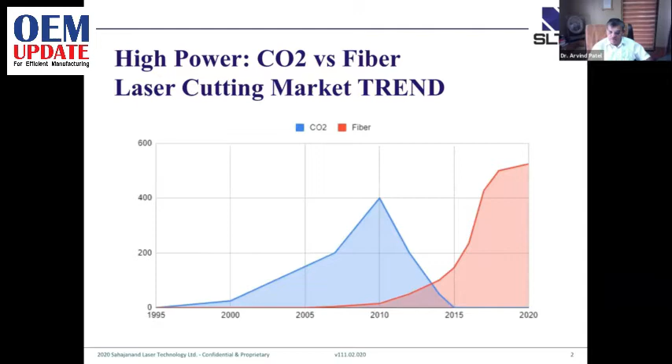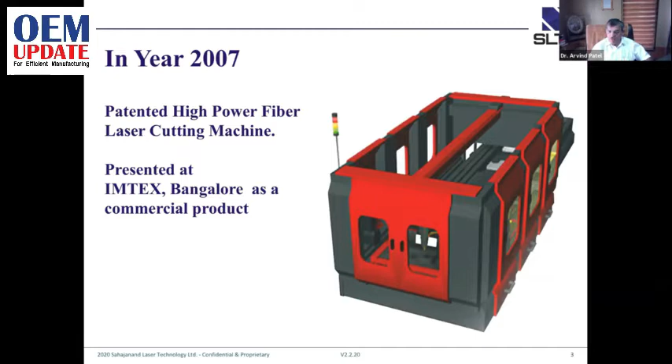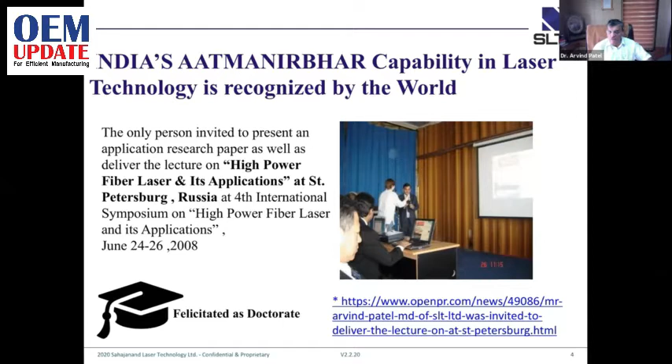We already introduced this in 2007 first in IMTEX and put it in exhibitions, and after that we displayed it to the international market, America, Europe, and lastly they invited us to Russia to represent fiber laser. Till that time, people were not aware about fiber laser technology and not interested in this technology. But we pioneered and did very aggressive work for promoting this technology. That's why they invited us in 2008 to St. Petersburg, Russia, where there's a company which is a high power fiber laser company, IPG, and another company which is a developer of fiber laser technology in Russia. There was an international conference about high power fiber laser technology where we presented a paper and showed the world that it can be the next generation technology, and we can be proud that India was the first to introduce this technology to the world. SLTL is also very proud that we were a main part of that.

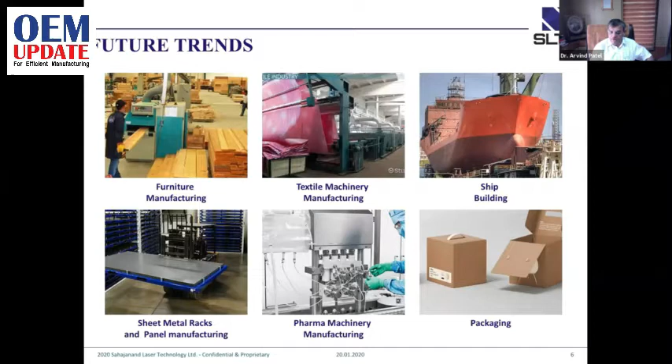So what is the future of that? India is now considered to be growing very aggressively in a lot of segments, so different industries can work it out because India now tends towards being Atmanirbhar, and we will not depend on other countries for manufacturing, from low end technology to high end technology we should be self-reliant. So we have a lot of industries growing, and it is a chance beyond 2020 for manufacturing industries like furniture industry, textile machinery, shipbuilding. We have a lot of shipbuilding, sheet metal racks and panels, pharma machinery, and packaging.

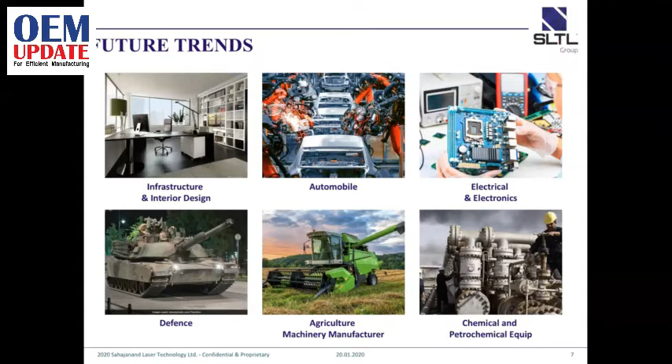We also have affordable housing to be made. This can be done by fiber laser technology. I'll give an example: I made my own house using laser technology and sheet metal only, no cement concrete, with external interior done by other technological ways. This is a good trend and a more economical way to do low-cost structures by cutting laser and welding.

Same with the automobile industry. Now the automobile trend is going toward battery-operated cell industry. There is a big industry there, so there is a lot of laser technology that can be used.

Electronics, electrical parts, defense - we supply a lot of lasers to defense too. In defense, it works in two ways: it can be used as a direct energy weapon as well. We do some work in that project also.

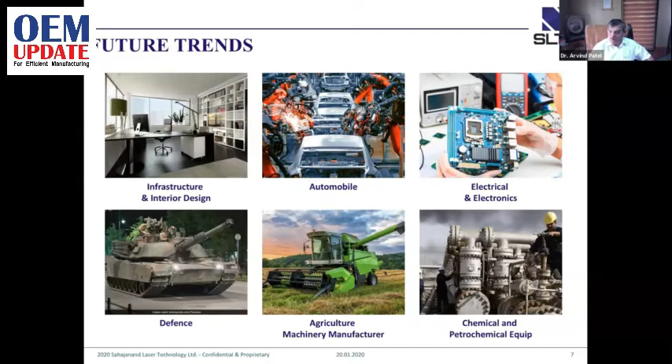There's big demand in India, as India is more than 70% dependent on agriculture, and we have huge potential for agriculture machinery manufacturing. There's also a lot of chemical and petrochemical plants coming up. Aerospace is also an important part. We are now making a lot of metros and railways ourselves, which also requires bus coach manufacturing.

An important point people are talking about is that even regular manufacturing can be replaced by 3D printing, so components can be directly made by laser. Today it's still laboratory grade, not much high production, but we predict that by 2030, most components can be manufactured not by regular machinery but by laser 3D printing - making a component directly from powder to a usable finished part.

Same with the semiconductor industry and medical stents. We make medical equipment and medical stents which use laser technology for very precise cutting. Very tiny components can be made and used for medical equipment like pacemakers, with cutting and welding done by laser. Same with computer manufacturing - a lot of structural fabrication can be done very aggressively with these technologies.

So this is the growth story through 2020 and above, and this is not only in India - it is already working internationally for this growth. This will be a good opportunity not only for India but the whole world, particularly fiber laser technology. Thank you for hearing me.

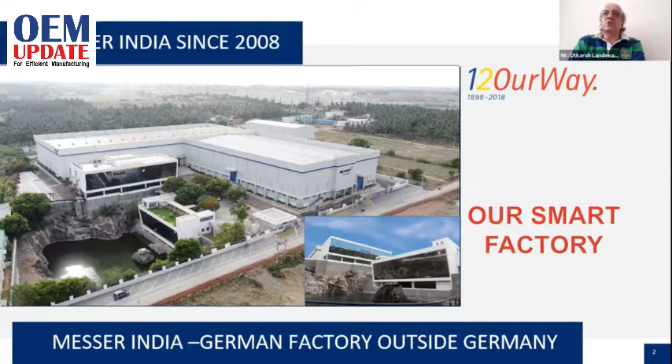When we look at this total integrated factory, which helps us build the machine here with all the key components globally developed and engineered in Germany by our global engineering team, this factory turns out to be a blessing for all Indian customers who are looking for a German product at a reasonable price with total backup support. There is no compromise on any manufacturing facility, service, or anything required to work on any product.

Just to give a brief background of Messer Cutting System, the first CO2 laser cutting machine was built by Messer in 1970.

Over time, we were focusing on laser cutting on large format, and only until 2007, where our regular customers who were gas cutting and plasma cutting customers made us get into the standard format laser cutting machine.

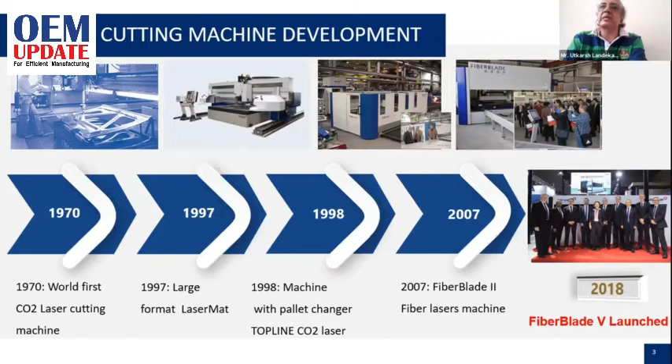But nevertheless, we are not forgetting our roots, and we will definitely get into total solutions wherein gas cutting, plasma cutting, and laser will be offered as a thermal cutting solution, let it be any technology, any function.

Our total product portfolio forms from axial plasma cutting machine, laser cutting machine, spare parts, consumables, and full range of gas cutting equipment and gas supply system. We also do the retrofit of plasma and laser cutting machines.

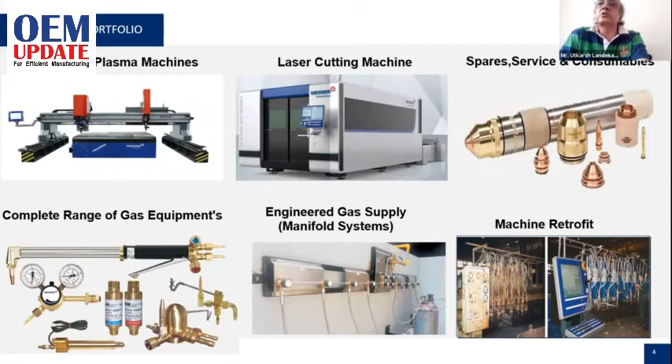This is our ultra motivated team where we are handling 1200 plus plasma cutting machines and 40 laser cutting machines.

So this entire team is responsible for SAARC countries, Middle East, and the machines are also exported to North America and Europe. So we are proud to say that we are producing global standard machines, wherein the thermal equipment manufactured in Coimbatore are definitely going to the world across.

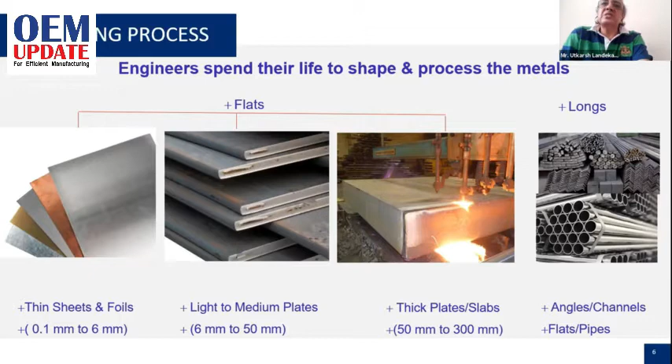Now we get back to the basics. Engineers spend their entire life to shape the metals, let it be flats or longs. Flats can be thin sheets, medium and thick plates, and the longs can be angle channel and flats, pipes. So there is a specific process and there is a specific way how you deal with it.

Our 122 years old experience gives us a clear-cut bubble diagram which makes the operating range of all three processes. Let's say laser will be 0.5 millimeter until 25 millimeter, 1 millimeter up to 150 millimeter for plasma, and 6 mm thickness until 300 mm will be oxyfuel.

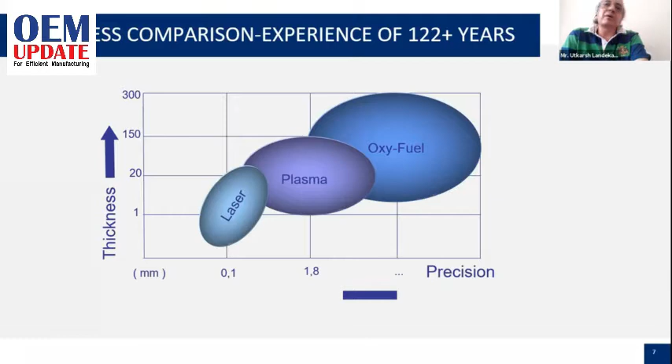This is for mild steel. Of course, for stainless steel and aluminum, the things are a bit different. The oxyfuel bubble is missing in this, but the gross bubble always remains the same whenever you want to choose a process. So these processes are divided into oxyfuel, plasma, and laser cutting, wherein the operating range and precision have been defined.

But here the main heat affected zone varies in all three processes. But these three processes are very fast as compared to water jet and machining process.

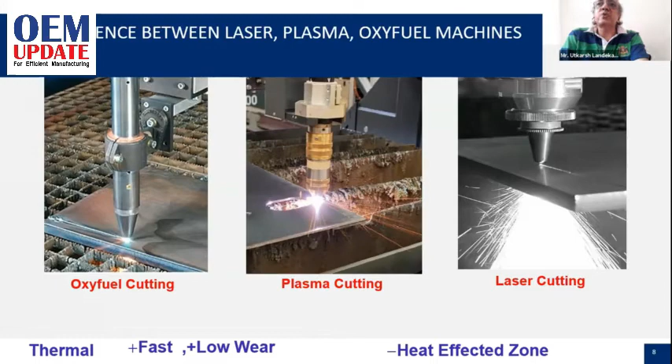These are flexible for straight cutting as well as bevel cutting, that is chamfering on the edges, which will give you the clear cut edge which can be welded, later machined, or just assembled as per the application need.

So what is important here is what exactly you are going to do with the plate. Though the seminar is of laser, we are talking of all these three processes in combination as a thermal cutting solution and not only a laser solution. I will come to the reason for this when we go through some of the next slides.

Another reason for selection of the process would be what is the hole that is going to get cut. The hole is the main reason where the types of process start getting differentiated. Laser, the reliable holes are 0.7 times of the thickness.

It can go a bit lower also, but the holes are not so good. Plasma between 6 mm up to 25 millimeter in mild steel can be cut in the ratio of 1:1, and in oxyfuel it can be 2:1.

Also, another important factor is what is the surface finish that is going to result. So we really need to make a smart choice between all these three processes, whether is it really required to get into laser or there is another process which can substitute this.

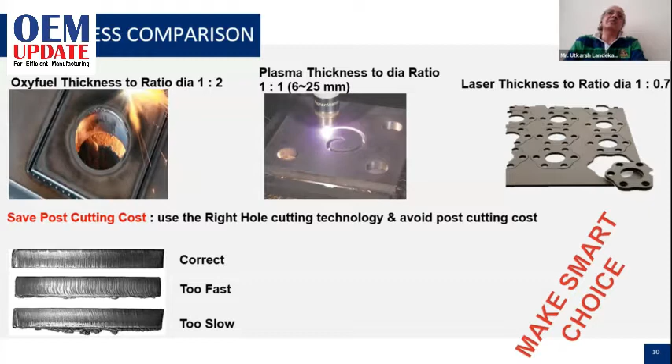The reason is that the time available is limited in the industry, so what is the process that will be fastest? As per our standard calculation, when you want to cut a 12 millimeter plate, the fastest process always becomes plasma, and plasma has been scaled up to 600 amperes, which cuts very fast, and no process can match it.

I will just give an example. A 400 amps plasma, if applied on an appropriate machine, can generate a cutting speed of 18 meters per minute, which is not possible with laser.

This is the reason why, though the seminar is of laser and we are discussing laser, we should really look into the application. So that is how we are also focusing on the job basis. I will be taking two examples in the next slides.

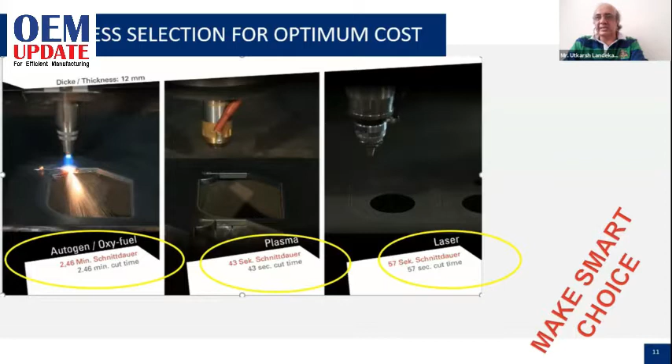Oxyfuel is an age-old technology, 110-year-old technology. You can have up to 16 torches working together, and if the jobs are identical to be produced in mild steel, there is no process which can beat this, because you are practically outsmarting any of the other processes. The thickness range is between 6 mm to 300 mm, and probably no other process can even come nearby.

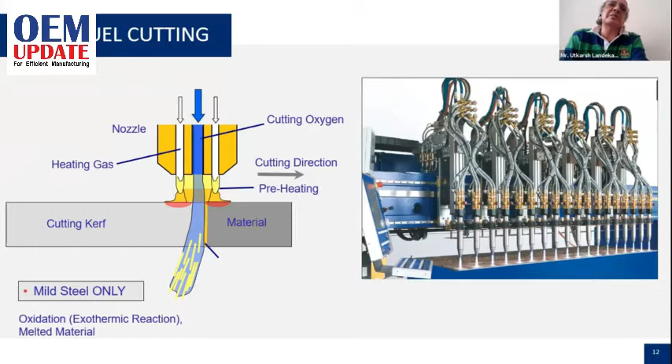So this process is still going to stay for the next few decades. Plasma cutting has been in a nascent stage, and right now it's in quite a matured stage between 1 millimeter to 150 millimeter, and still is one of our maximum sold machines across the world, from Messer Cutting Systems. Our name is reckoned with plasma cutting high technology, and the best of the plasma machines are produced by Messer Cutting Systems.

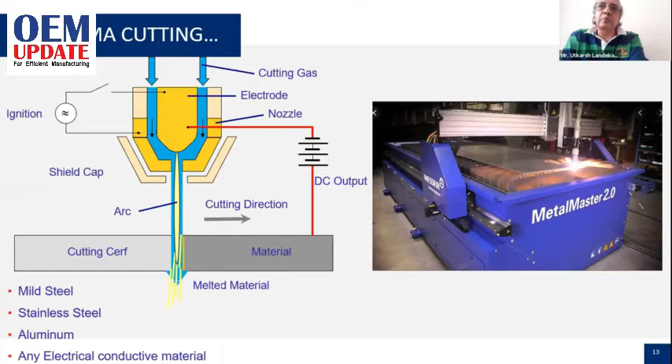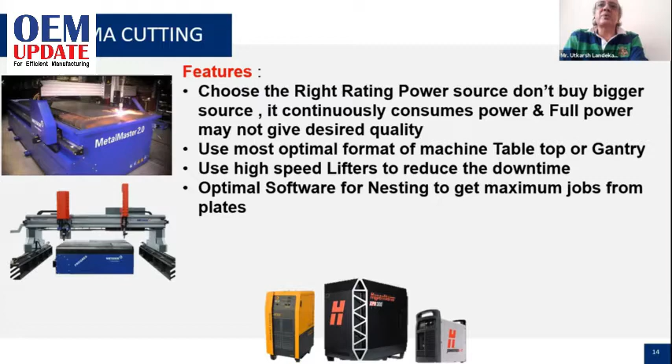So plasma still remains a good process. What you need to choose is the right type of source, right combination, what material needs to be done. You need a high speed lifter and correct software and correct format of the machine in order to use the plasma. Running cost also plays an important role. Now if you see the running cost of plasma and laser up to 20 mm, they are about near, but after 20 mm, let's say take 50 mm, plasma is very expensive, oxyfuel is still cheapest.

And for 50 mm cutting by laser, there is really a big rat race initiated by our friendly neighbors across the Himalaya, and these people are talking of 30 kilowatt, 40 kilowatts, and God knows where it is going to end. But these friendly neighbors are really making everybody confused that laser cutting machines are going to replace oxyfuel and plasma.

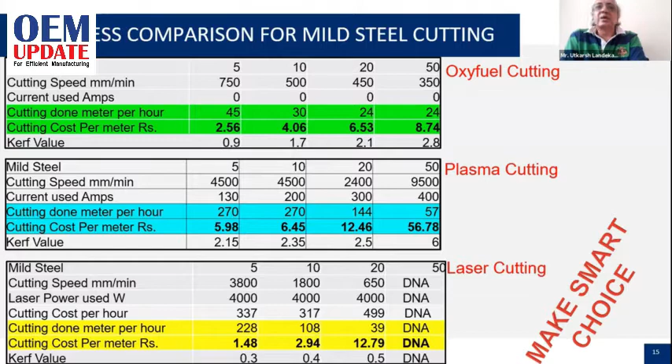So what to say? We need to choose the right process at the right appropriate productivity, and what is the post cut operation that needs to be looked at. So what a customer has to generally look into is the breakup of the kerf losses, that is the material burning, what is the cost of the gases, what is the power cost, what is the cost of maintenance.

What is the investment cost, consumable cost, material yield, and cost of manpower. Here the most important is the capital cost. The cheapest machine need not be the most economical running machine. After 3-4 years, maybe that machine becomes a liability. Or the most expensive machine need not be the most economical or highly productive machine.

So one has to really strike a balance, and we have a proper team of application engineers who will look into your application study and apply these 8 parameters and then recommend you, oh, this is the right solution for you. Laser machines are available in standard formats.

So whenever we close our eyes and say laser cutting machine, the picture that is shown only comes into the picture. It's a rectangle tiffin box with a pallet changer. So everybody says when it is a laser cutting machine, it is like this only. Well, partially it is true. The race is on in this format, but there are other formats of machines as well.

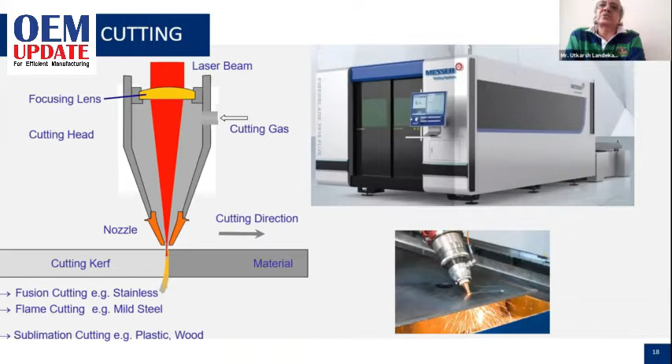These machines are designed primarily in the first world countries, and I really don't know why 1.5 by 3 meter, 2 meter by 4 meter - these are not the sizes of plates used in India. In India, we use 1500 by 6300, 2500 by 6300.

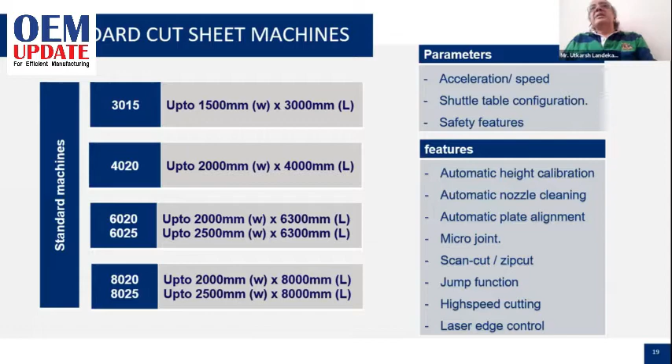So those machines are not designed for that, but we are of course proud to say that we have designed machines which can take care of all sizes, and we also follow the size, and we have also developed custom built sizes, and of course all the functions of automatic height calibration, alignment, zip cut, scan cut, edge control, 1G, 2G, 3G - all this acceleration we are definitely looking into.

Next comes the format of the machine. Again referring to our friendly neighbors, they are promoting the open type of machines. They are not really concerned about the eyes of Indian customers, so they are least bothered. They just ship out the machine, and what happens to the worker, what happens to the workshop supervisor or the owner of the company, they are not bothered.

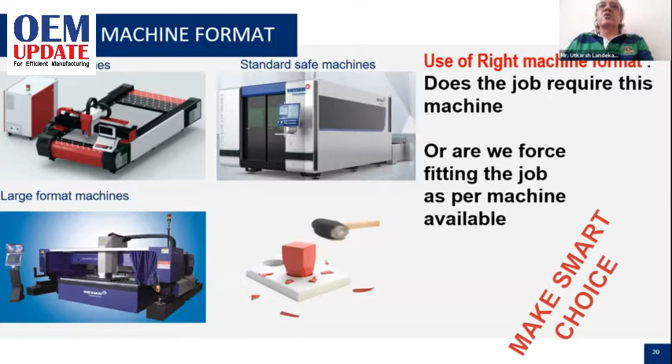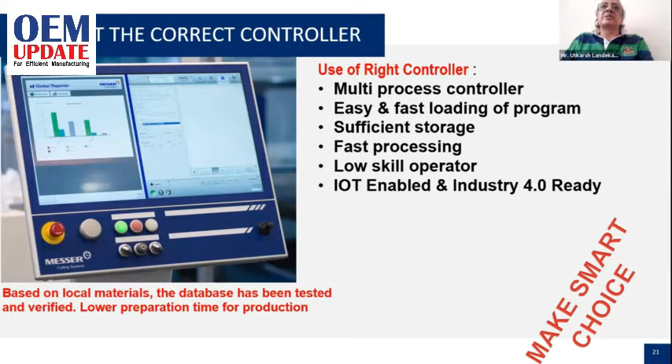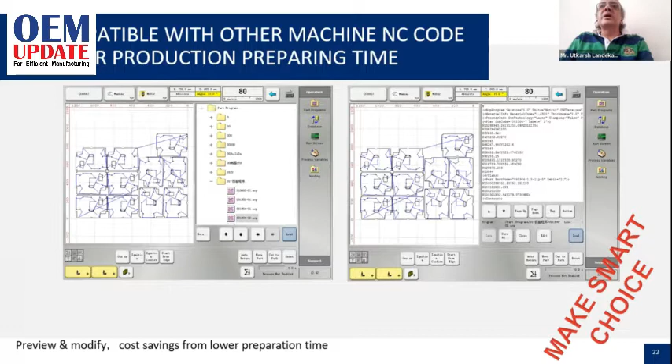There has to be a right controller. So in future, when you are looking at a laser cutting, plasma or gas cutting machine, the controller should be IoT enabled. It should communicate with other machines, and it should be ready for Industry 4.0, so people can definitely hook up the machine. The controller should be able to take all the local material available and all types of drawing formats - it can be, let's say, Trumpf, Bystronic, or others. The controller should be able to take the drawings derived out of that or from any other nestings.

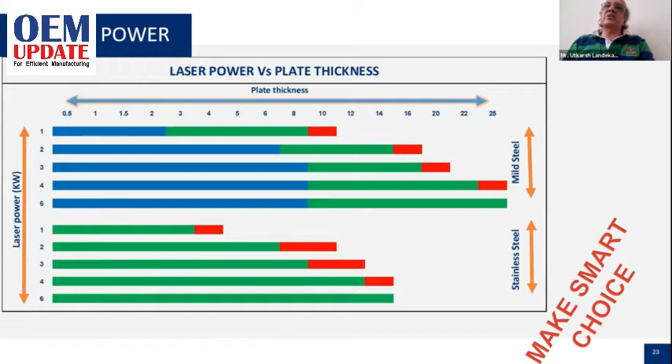Imagine moving 100 mm plates over that, or using a pallet changer for cutting. So don't overbuy the machine—buy the appropriate head and appropriate power source.

At Messer, we always come back to our bubble diagram, and the laser can be 8 kilowatt, 10 kilowatt, or 12 kilowatt. Yes, we are capable of integrating that, but today I want to share a technology called combo, which is a combination of laser and plasma, so the customer can get the job done economically.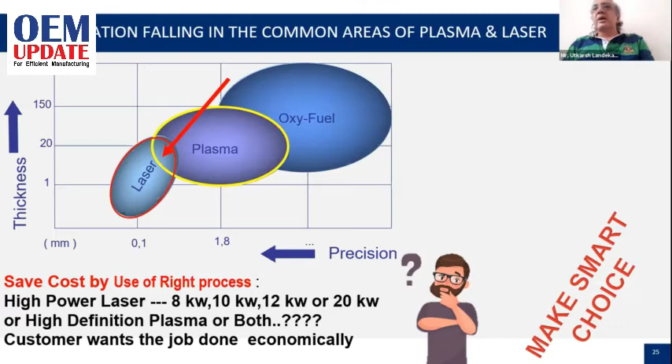If the hole is 30 mm and you're cutting on 10 mm, why do you need a laser? Or if you want a large area cut, why do you need plasma? Let's take an example: the nesting has to be done properly, the process calculated, and an optimized solution worked out before you even start cutting. You have to make the right choice between available nesting options, study and derive the formulas before you start cutting.

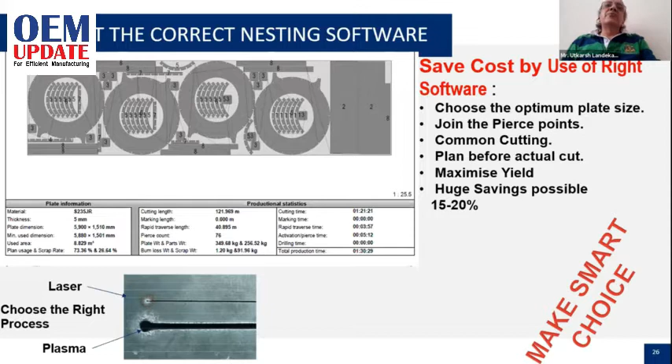The rat race for high power is going on. Here are examples from a 12 kilowatt laser—the edges are really bad. It looks like somebody took a chisel and made the job. This cannot be termed laser cutting, even with a top known laser source and top known laser cutting head. So one needs to make a smart choice. Speed is not always the criteria, and a large format laser need not always be taken.

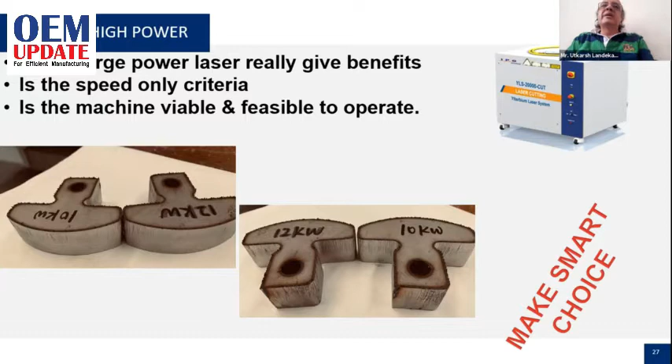One needs to optimally choose the right process. For example, if you want to cut 25 millimeter stainless steel on a laser—see the previous example—versus the finish obtained from plasma. Looking at this, any layman would say they prefer the left side, but then the question comes for the holes. I'll cover that in the next slide.

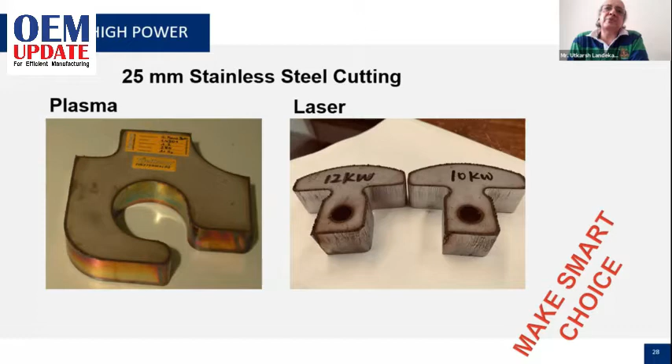If you look at the surface finish beyond 10-15 millimeters, it's a different story. With plasma, you definitely get a very good surface finish and don't have to do anything further in many applications, but lasers will be very rough. If you take a job requiring automatic holes, the laser and plasma combination can do the job in 77 seconds, while the laser alone needs 84 seconds.

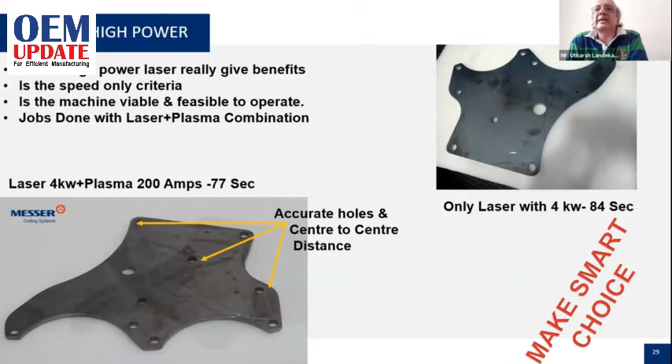So this is the process we would like to promote and propagate, and we request our honored attendees to look into this. These are the large format machines where the combination technology can be used, and it has been successfully implemented in India and the Middle East.

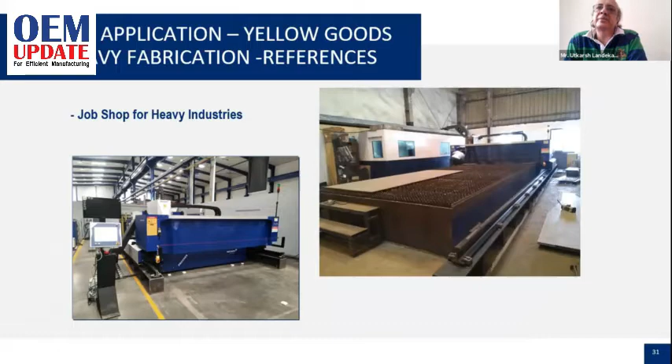All these equipments are ready for ERP connection, nesting, proper design, and optimization, and they continuously give you backup on a mobile app so you can monitor your factory with laser cutting, plasma cutting, and gas cutting. These technologies can tell you exactly what's happening, how to optimize, and how to economize. This is what we feel is the future that is coming up.

Welcome, Maulik. Thank you for inviting me, and thank you for the opportunity given to express my views on how Indian laser machine manufacturers are transforming, and what the future of laser cutting systems is going to be like. I think a lot of things have been covered by Dr. Arvind Patel as well—that the entire journey started from CO2 to fiber.

I think the term laser cutting has now changed—if you talk about the 90s or till 2010, CO2 laser was dominating, and now fiber laser cutting is dominating. So the way we are living into a new normal, that same new normal is that laser cutting means fiber laser cutting. That is the new normal, and that normal has been created. We should be proud of that.

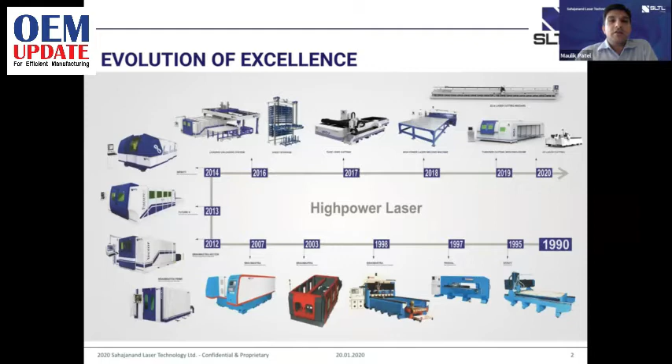It is very difficult to predict the future, but I think the future is going to be more onto an automation aspect when it comes to advanced processes like laser cutting. As in certain Western countries, it will happen late in India, but eventually it will happen, maybe 5 years down the line or so. The way fiber laser has picked up after so many years, I think the same scenario is going to happen for India as well, where when labor and things get expensive, people are going to opt for high-end automation solutions.

And when it comes to automation, probably there are going to be things like lights-out operation, which are the terms used in Western countries. The same thing will be visible and will be discussed in the Indian context as well. That's what we look at.

And then of course, digital. Our Prime Minister is also focusing on Digital India. On the same aspect, new terms like IoT, digitization, Industry 4.0 have been coined. Once you have a machine, people are looking forward to the way there are autonomous cars - there is going to be a sheet metal shop which is going to be running on its own. In Western countries, a few companies have started doing that. I think eventually it will happen in India as well. So digitization, IoT, and getting the data into their fingertips is going to be one of the key aspects.

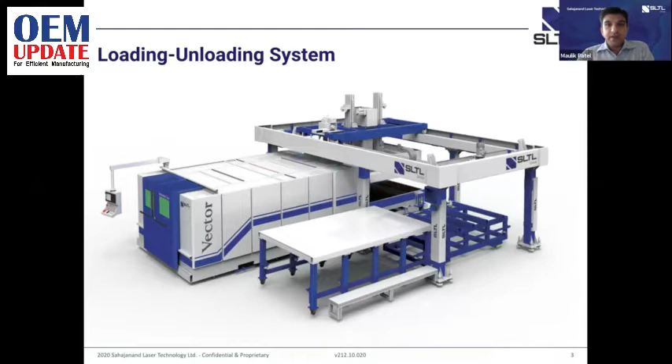As I showed this one, this was done in 2016. So again, we were way ahead of time as a company. But yeah, that's very futuristic stuff - the way it is going to be handled, advanced processes. And of course, the way we look at it is like autonomous operations along with artificial intelligence and motion control systems, optimized motion control, Industry 4.0, or vision systems along with the laser cutting machine.

I'm talking about a lot of complexity into the system. But yes, eventually, if autonomous cars are possible, then the future of laser cutting machines will be much more digitized and, I wouldn't say manless, but I think it would be more future ready, where the machine and a man would be collaboratively working for achieving the relative goals.

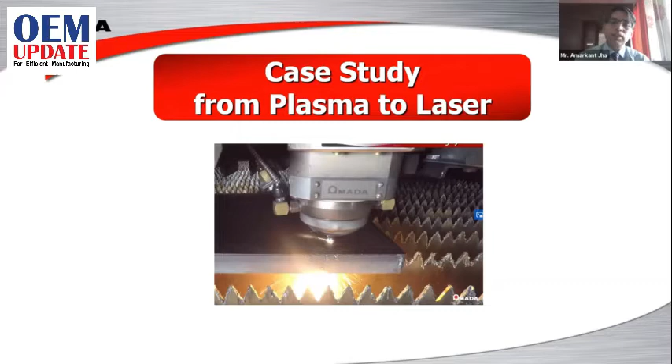Looking at this topic, plasma and laser, I'm going to take you through a case study that Amada has witnessed in Japan.

This customer in Japan is located in Saitama Prefecture with just 16 workers. They mainly manufacture conveyors, cranes, parking systems, and elevators. So mostly they are concerned with thick material or mid-thick material. They were using plasma for quite some time, and when the machine got older, they decided on a new investment.

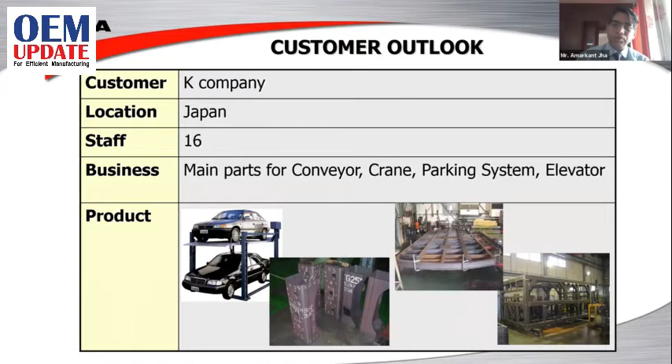They invested in an Amada laser machine with a shuttle table where material can be loaded and unloaded automatically, and also IoT-based software like Dr. ABE Laser and AP100 software, which were put on a network. So the whole factory was totally digitized.

So now the system is IoT-based. Amada is way ahead in terms of IoT. We have developed our own virtual monitoring factory where you just pull the orders from your ERP system or your production management system.

You feed it to the software, and the software loads the schedule to the machine. The operator just has to execute the schedule as per the order status, and you get a real-time status on your monitor. We call it the virtual monitor or V-factory. This system is completely IoT-based.

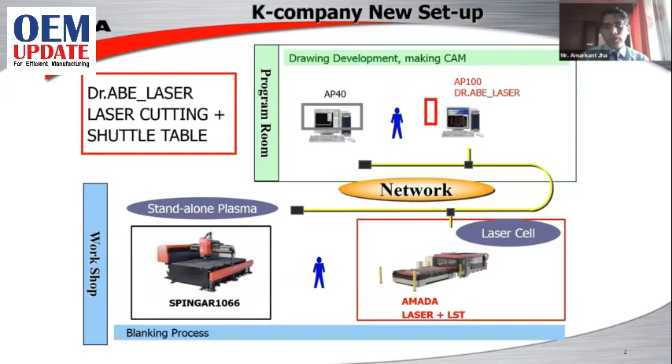In this case, what happened? To summarize this case study, due to plasma's accuracy limitation, as we know, laser is more accurate than plasma. So small size holes were not able to be cut using plasma.

Also, plasma has a characteristic of taper cut. The edges are tapered, so many times the products were rejected. The Japanese quality standards are very strict, so many times their jobs were rejected because of the taper angle.

Also, the heat affected zone while cutting with plasma was much bigger than with laser. Because of this, the bridge material required between two parts is very high compared to laser.

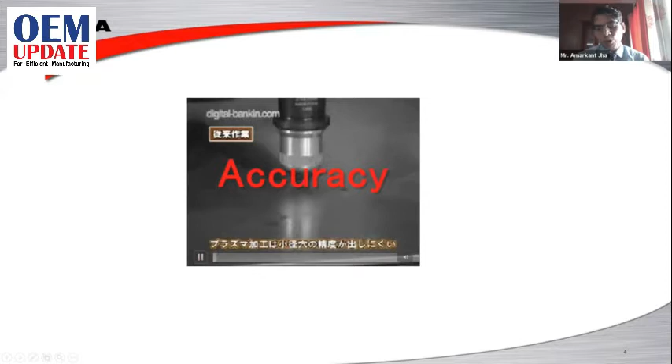Now, we have captured these things using a video shot in the factory. It will be interesting to see. It's a little old video, but we can see how the plasma has been replaced with laser.

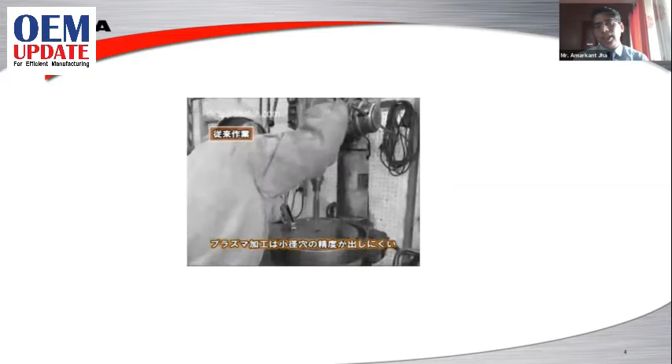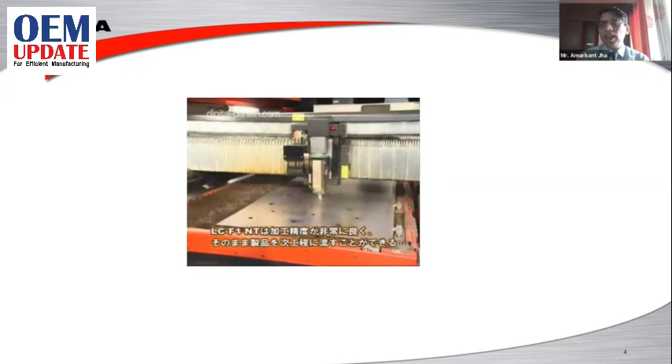These are the processes - when you have small holes, drilling is required. In case of laser, less than the material thickness, like 50% of material thickness, can also be processed with good finish.

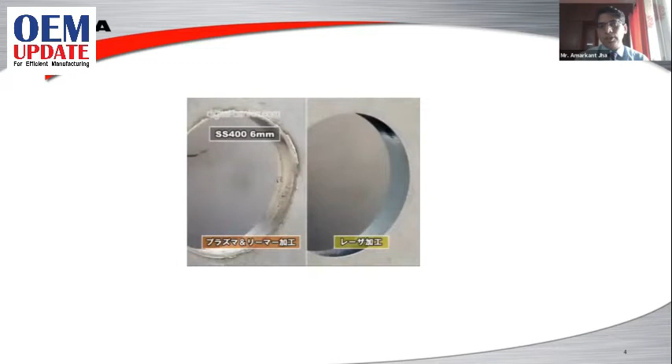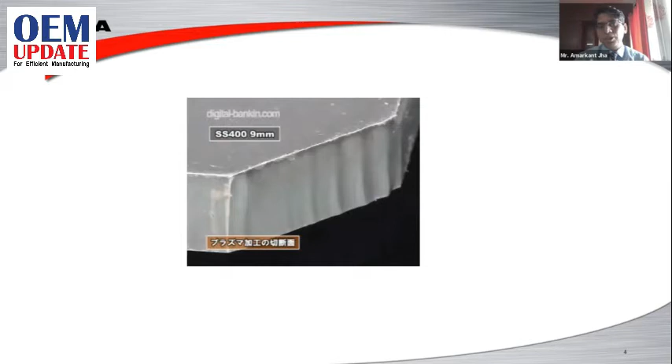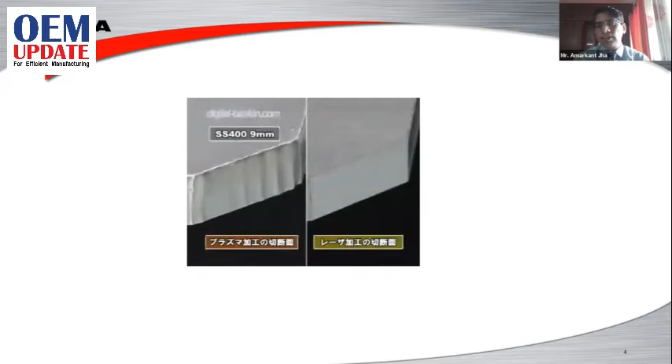Similarly, you can see here this particular job of 9 mm thickness had a substantial amount of taper. When they switched over to laser, this taper was completely eliminated. With laser, you can achieve a taper of 0.2, 0.1mm; even with 25 mm material, you can achieve up to 0.5 taper.

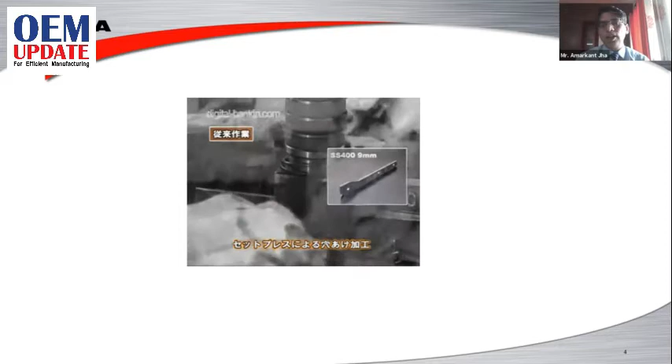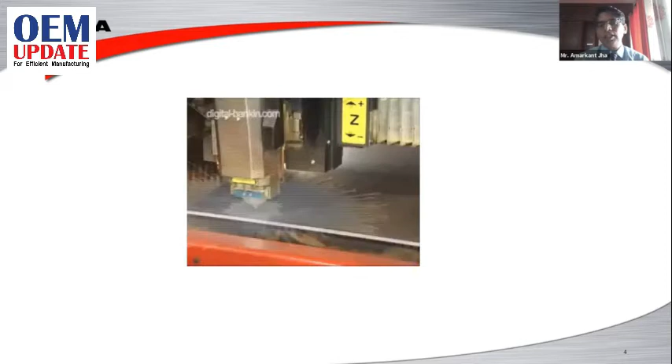This is the secondary process they used to do - after cutting on plasma, they were making small holes on a set press. But in case of laser, this process was eliminated.

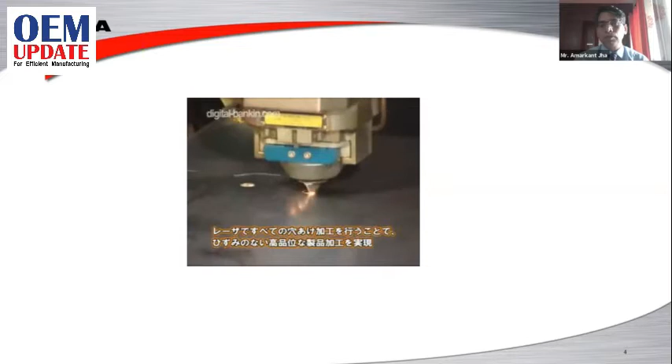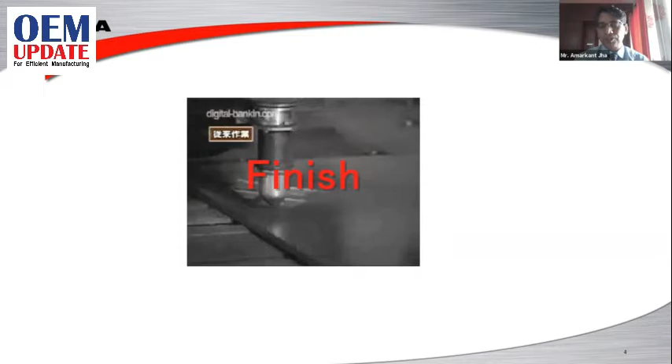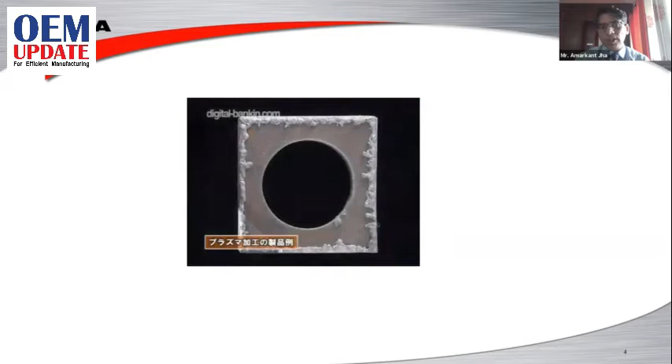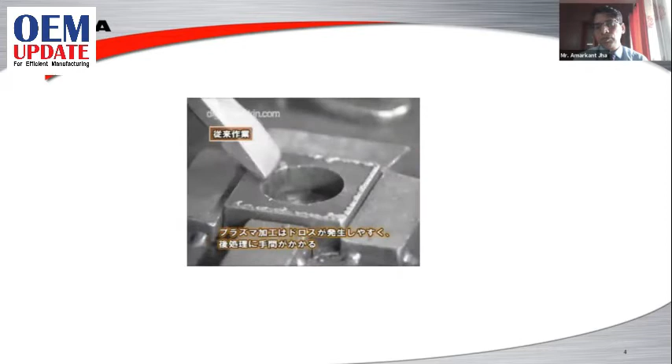When it comes to cutting finish, laser has a technology called WACS, water-assisted cooling. With plasma, you have to do a secondary operation to achieve this kind of finish. But when they switched over to laser, this process was not required.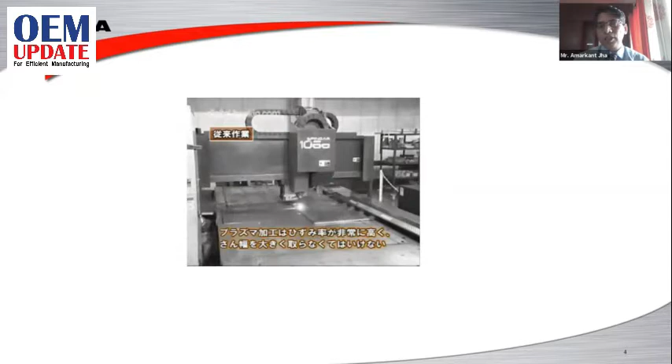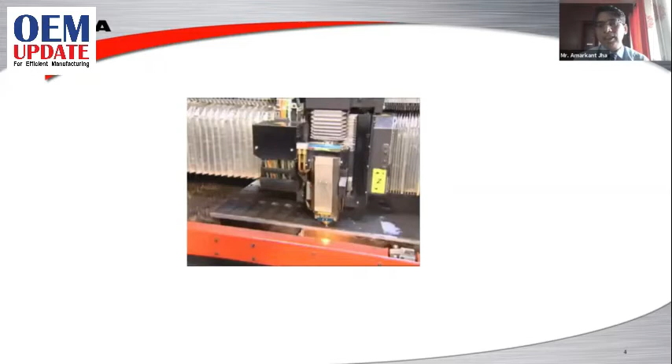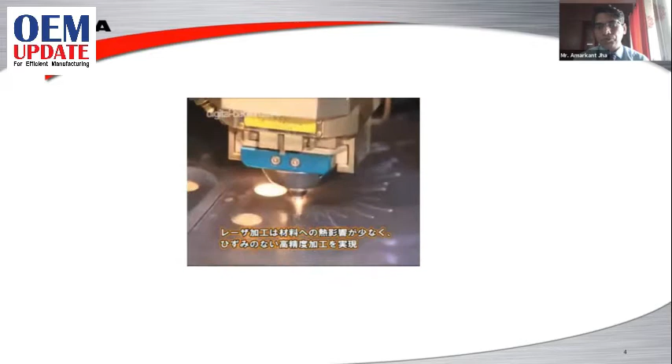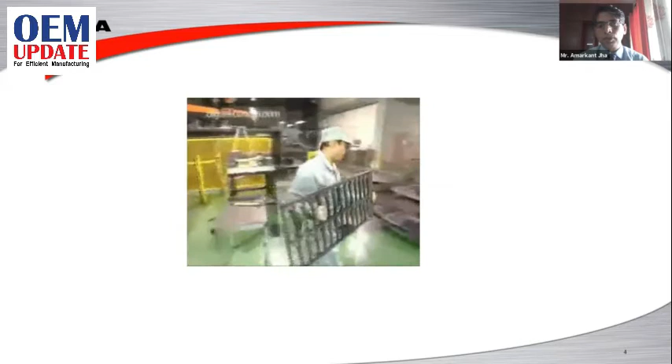This is an example of material utilization using laser and plasma - how is the difference? In case of laser, the gap is as less as 5 mm for 25 mm thickness material. So your utilization becomes way up. These are the skeletons.

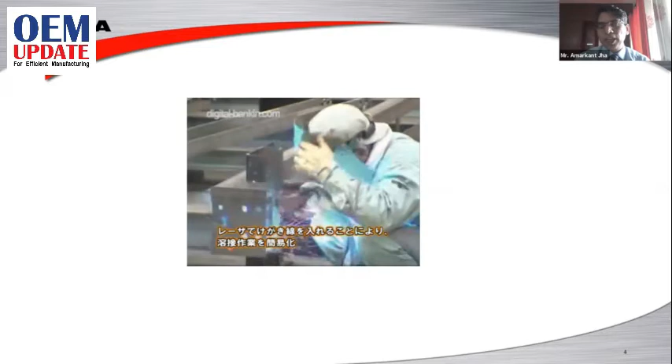And apart from these advantages, laser also has the advantage of processes like marking. You can do marking on the material, and these markings are very useful, especially while doing the welding process. You can locate your parts well, and you can do the welding correctly.

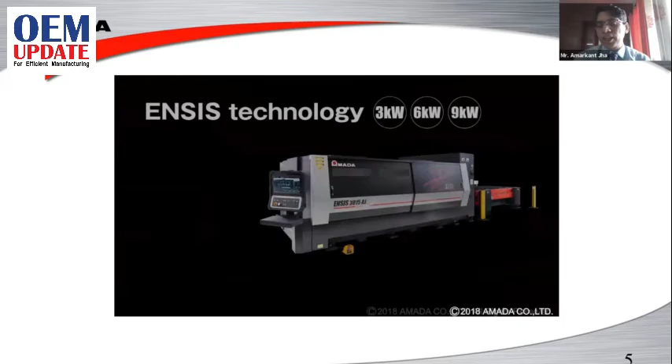Coming to fiber laser, we have a perception that fiber laser is good for thin material cutting, and it cannot cut all ferrous and non-ferrous materials. But using ENSIS technology, Amada has introduced this beam control technology. So whatever limitations were there with fiber laser, we have overcome them. Using this beam control unit, we can process from thin material to thick material with ease, faster speed, and a very good cutting finish.

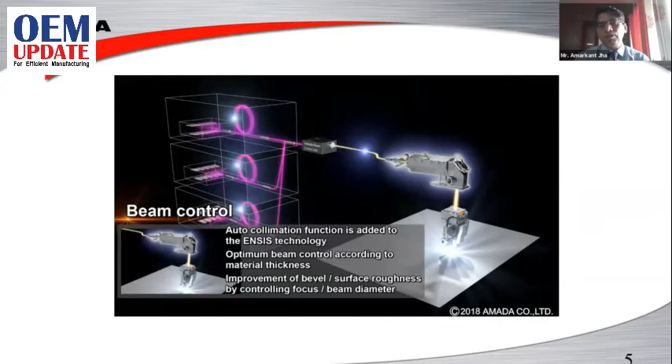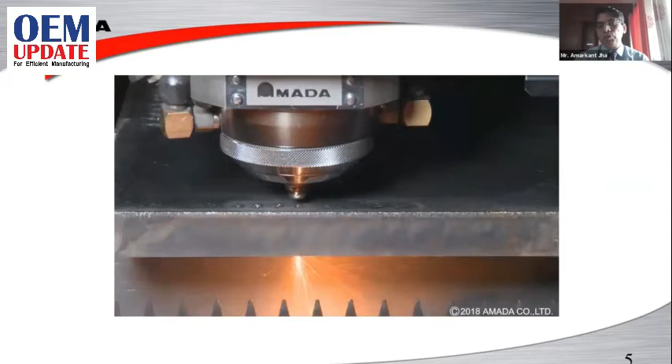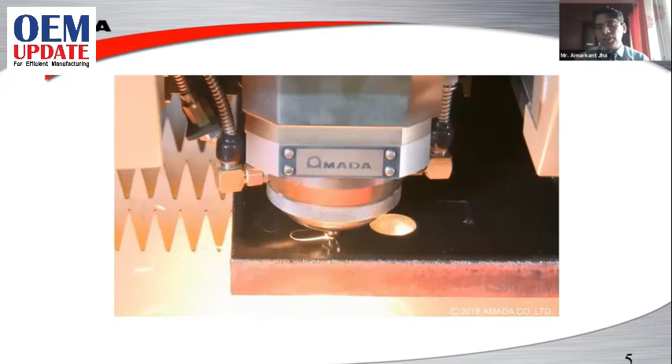Even with a 9 kilowatt laser, we can achieve a pierce time of 1 second on 25mm thick material. Here you can see the 25mm being pierced in just 1 second, and you can look at the cutting finish and the speed. This is because of the auto collimation unit. You can see the cut surface of 25mm thick mild steel using ENSIS technology.

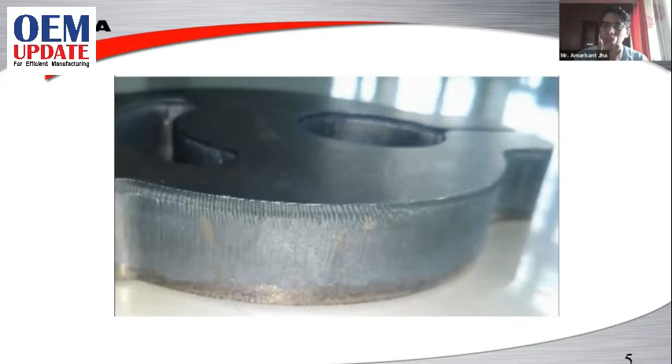This customer's factory could observe a productivity increase of almost 72%, because the time was decreased due to the process of separate punching, stress removing, and the cutting time difference. If you see, laser was slightly slower than plasma, but if you look at the overall productivity, the laser gave much better output.